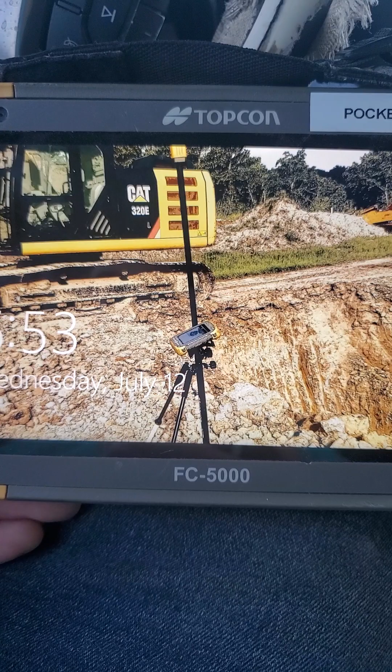What I'm going to be doing is showing how to understand what we're doing on the job site when it comes to this GPS.

Alright, I'm going to go ahead and sign in. This is the FC5000 Tesla. This is a job I did back in Houston.

Look at that, beautiful. Anyways guys, as you can see, it looks just like a computer, because it is. This is a tablet that is a computer. It can do everything your computer can do.

I highly recommend that you don't do things that you shouldn't do, mainly because once you get a virus, it is really hard to clean these things up. It is a computer, but it doesn't act like a computer sometimes.

So when you get to this screen, the only thing you should do is just click on this right here.

I got one of these pens right here. As you can see, I got this at Best Buy. It's the bamboo.

Sorry for my dirty fingernails. Jesus Christ, I guess it comes with the job, right? Play with dirt all day.

Sometimes you gotta double tap it. Alright, so sometimes you gotta be slow with these things.

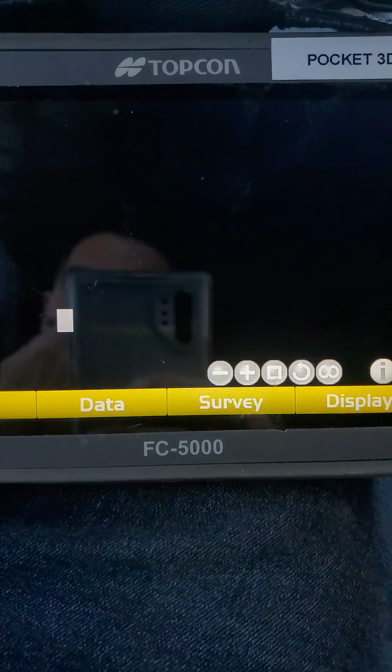Alright, so this is the project that I was at yesterday. This is my base, it is not set up. Okay, this is the GR5.

Some of y'all are probably using the newer ones, which, newer isn't always better. Alright.

So guys, this is the plans. Okay, so when they put the plans, they're going to create a CAD file. With that CAD file, there's a guy that will take all the information from that CAD file and he'll design this on a computer in a TP3 file. And all it is, is a different type of format that allows the software to be able to understand what that data is and use it.

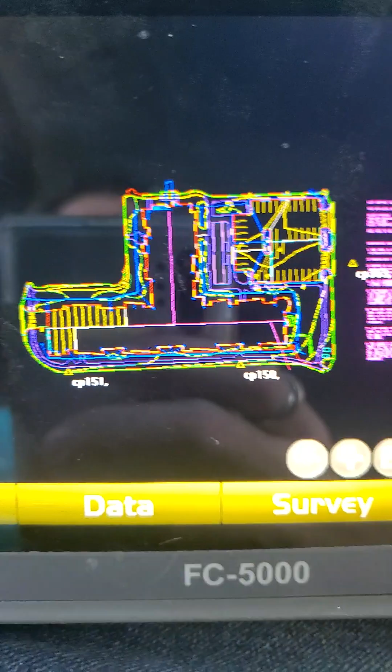Now let me just put this out there, I could be completely wrong. I did not go to school for this. So if I do say anything that is not correct, please correct me in the comments. I would love to learn maybe the terminology of some of this stuff and actually what it means. But I can at least show you and tell you how to go to work with this.

Okay, so what we're going to do here, as you can see, I'm not connected. I'm not going to be able to connect because I don't have anything set up at this job. I'm at a whole different job. I don't even see a GPS pole here.

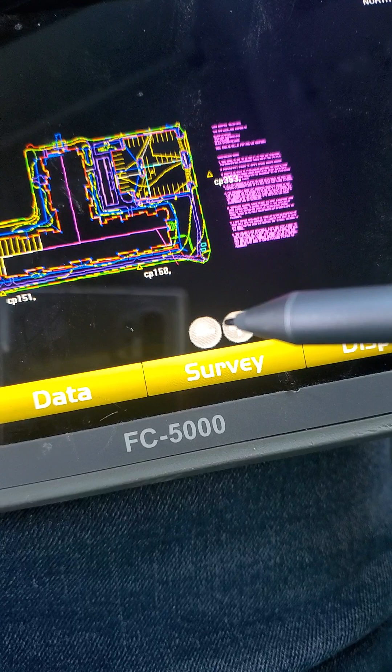So as you can see, you have all your little buttons down here. You see that hand? As of right now, I can grab everything. See how I can grab it? I can zoom out.

Oh, and let me tell you, I've done this before. I have uploaded a job into this, and that's all I seen. And so I figured that I did not upload the job right because it was just a little dot. Make sure you zoom in, okay? Because it took me 2 hours to figure out that I didn't zoom in, and I could have easily really messed up the file trying to figure this out.

So for some reason, this thing zooms all the way out. I don't know why, but that's what it does.

Alright, so as you can see, this is a parking lot. You know, I don't really remember. Oh that's right, okay so this is a parking lot, and these are apartment buildings.

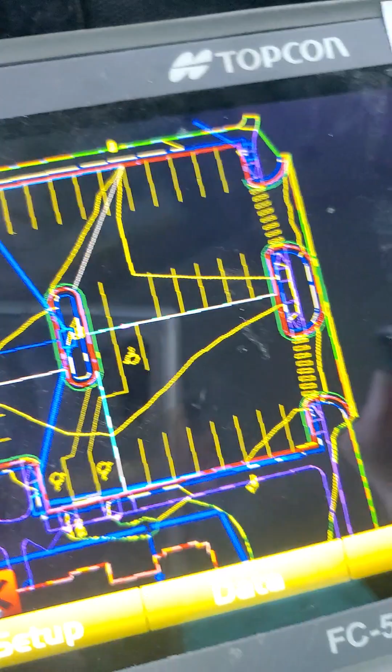And you can see all these lines, and it can be kind of confusing, alright? So you see the red, those are my curbs.

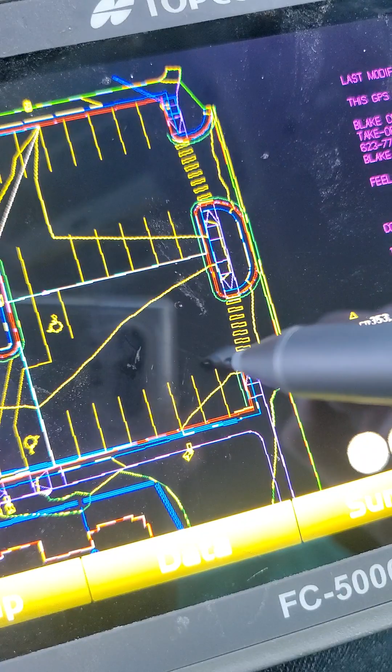Okay, when I'm running GPS and I'm going to cut this parking lot out, it's got to be pretty perfect. You got to get it to a tenth at least. And when you're cutting, when you're taking your dozer and you're going through here, you can't just turn on GPS and cut it out.

People have a misconception of what GPS is, and they think that anybody can just get in GPS. And then, another thing, I've seen people with 30 years of experience on a dozer, and you stick them in a GPS dozer, and they can't do anything.

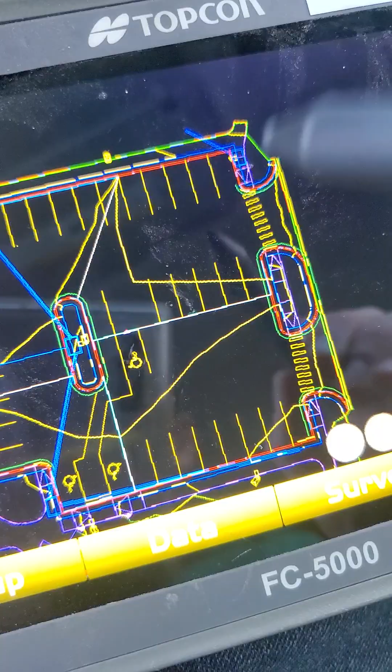So, GPS, being a GPS operator who's actually good and understands the GPS is a whole nother level, okay guys?

So let's say that there is nothing here and it's a flat field, and it's your first day on the job, and you want to figure out how to get this job started. Alright, so first off, you're gonna go stripping grass, you know.

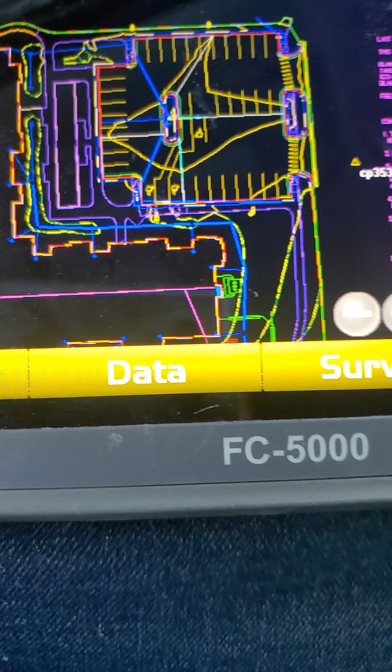Now, if the job isn't lined out, what you can do on the dozer, what I always do is track around. You need to take that dozer, put that blade barely on the ground, and go around to see what's there.

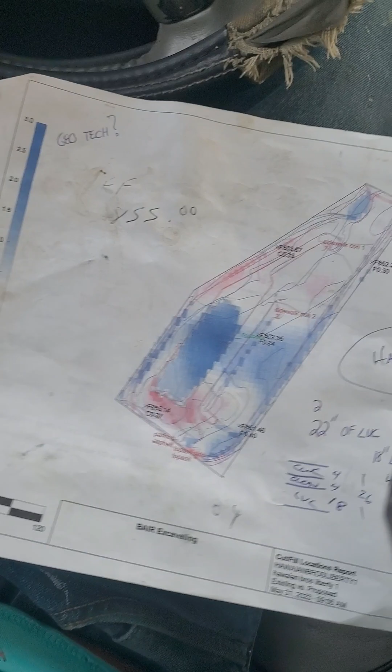Now, you can look at a topo. This is what a topo paper will look like. It shows you where the fill is and where the cut is. That's nice and all, but you need to know yourself.

So when you go out here you need to figure out where this cut is. All you gotta do is make a few little cuts. Don't try to hog out a whole 2 feet. Put your blade down and watch.

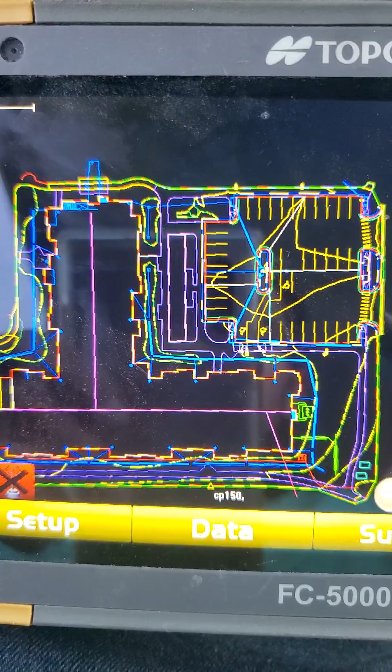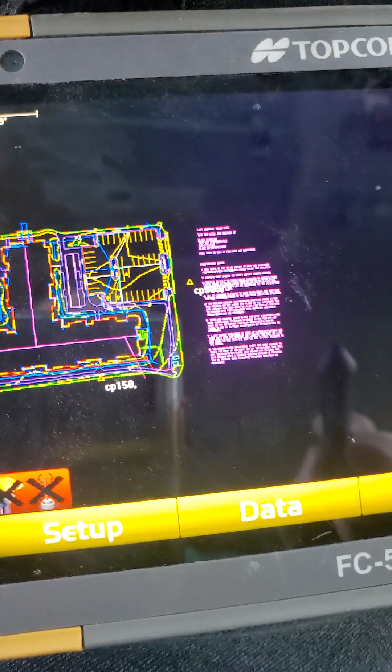Another thing is, guys, I'm gonna make another video to set up your dozer. I've been working, so I moved out here from Texas to Kansas City, and dealing with some of these operators, I don't think they fully understand the full potential of the GPS tools on the dozer. So I'm gonna make another video when I have time in a dozer to reset up your display options, so you can have your indicators here on the dozer.

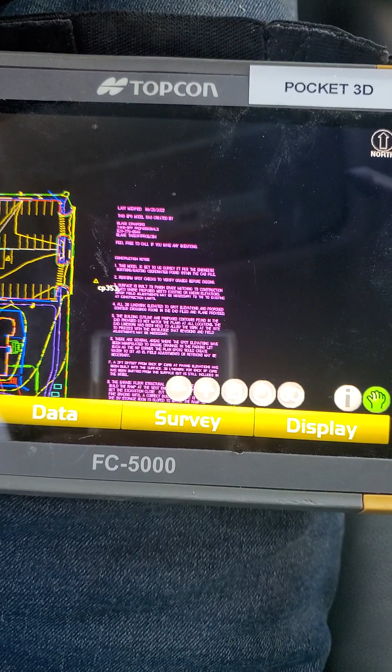I don't have it, but you can go into options and pull up your viewing options, and on the left side and right side you can put grade indicators. Those grade indicators are going to tell you the corners of your blade and where it needs to be. I don't understand why anybody would not want that. So when you run your blade on the ground, you can see how high and low it is right there in front of you without having to do the math of these little numbers over here.

You don't have to even think about numbers. You can just look. If it's in the green, you're good. If it's in the red, you're high, or something, it's one or the other. Who knows? But I'll make another video.

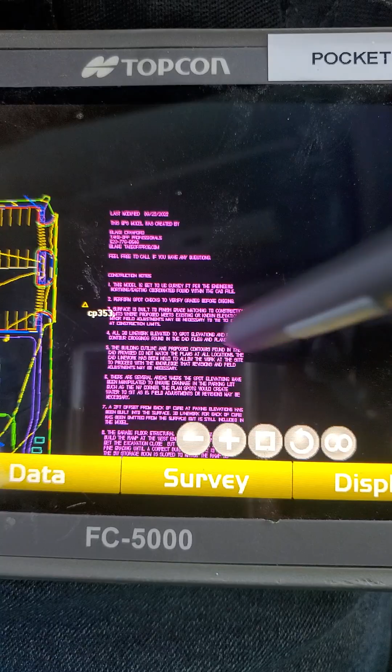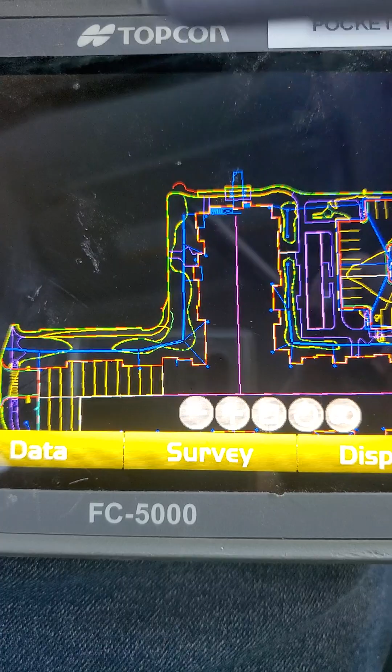Alright, like I said guys, this is just an intro to this channel. I'm just pretty much giving y'all some detail of what this channel is going to be about. Another thing I'm going to do is pull up plans. I'm going to put plans on here and show y'all how to read those plans and how to take those plans and incorporate that into this as you're working on a daily basis.

Okay guys, I was at a job just a few days ago. This guy was running GPS. This ain't the job. I could probably pull up the job, but I'm not going to do all that. You know what, let's do it.

Okay, so look guys, if you want to change jobs, here's your data. All this right here, let's go through it. Project - that's where all your projects are.

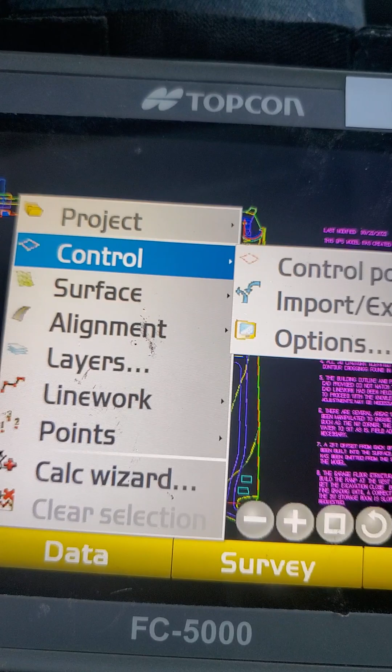Control - that's going to be where your control points are. Your control points are your points that should not move throughout the whole job site. Those points should be staked out with elevation, so you can always double check yourself. And you always want to double check yourself, guys.

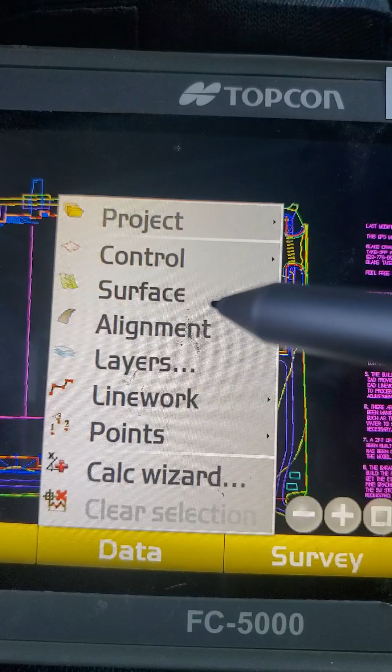This GPS is not always right. There are so many factors that can come into play that can make this GPS off. So if you have a rover, I would check your blade as much as possible. Know what your dozer is going to be at.

If you don't have a rover, you can easily check it by other means. If the job is already going and there's already stuff out here, you can take that blade and do what's called a position check. I'll make a video to show y'all how to do all that. You can shoot it off one corner of the blade, and walk that dozer up to something that is already built, like a curb, top of concrete. You can pull the plans up and see what that elevation is supposed to be.

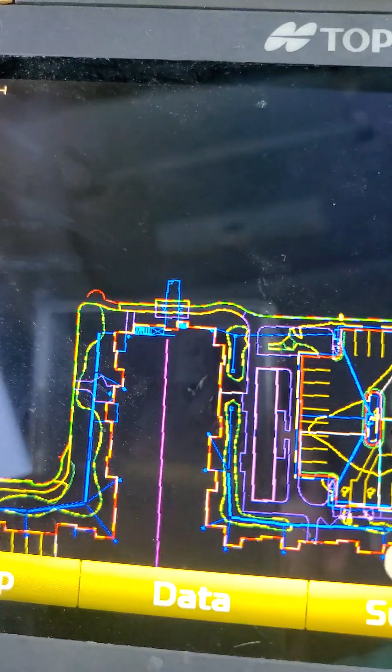Let's say it's supposed to be 973.00. Well, you can take that blade and put it right on top of that concrete. Alright guys, sorry about that, I had to get in this machine because I also have to work. Anyways, back to what I was saying.

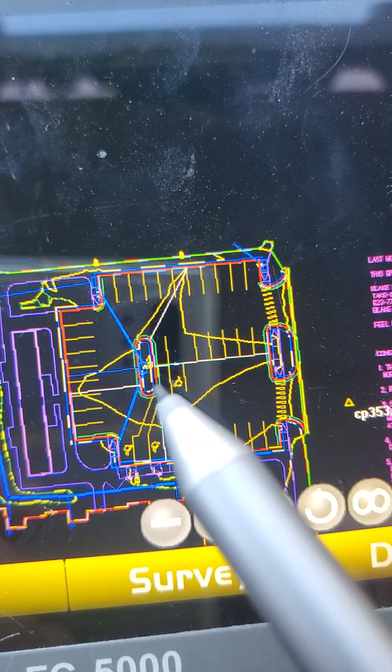You can take your concrete, or you can take the top of your blade, and come over here, find the elevation on the plans. And with the dozer, you can do a position check where it shows you the elevation, and you can put that blade right above the top of that concrete, and you can pretty much tell if everything is adding up. You can see on the GPS on the dozer, if your blade is above the concrete and on the GPS screen it's showing you're over here, something's wrong. So you need to double check yourselves all the time.

I've seen where people have put something in and it's 10 feet off. Well, guess what? Ain't nobody getting paid, and you might lose your job.

Alright, so guys, I'm gonna go ahead and do a quick walkthrough. I know this is a little bit longer video than I expected, but we're gonna go ahead and really quick show you what all this means.

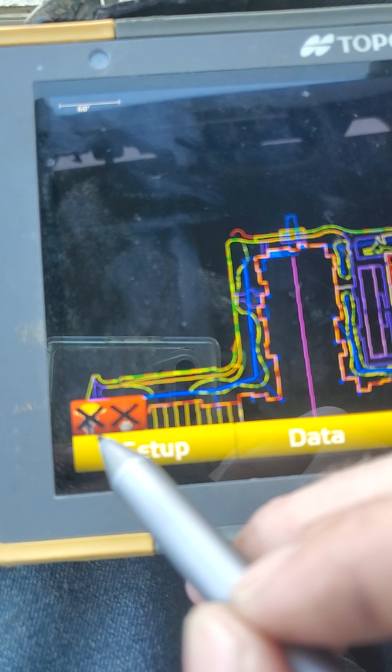Alright, so that right there is your base. No, I'm sorry, that's your base. Even though that one looks like the base, this is the base. This is the antenna, okay? So you have to remember that.

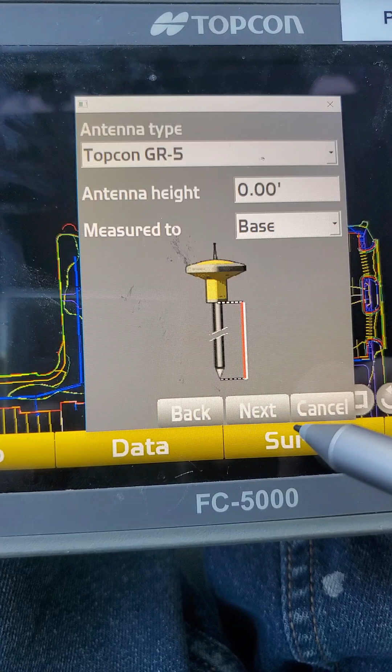This is how you set up your base station setup. If I was to set this up... known control point base. Usually I don't mess with this stuff, okay? Usually this is exactly how it is, alright?

We do 0. It all depends on who comes out and localizes the job. Whoever comes out and localizes the job is gonna really determine the height and what control point it's going to go off of. And once he does that, usually, alright, so you see what I just did there?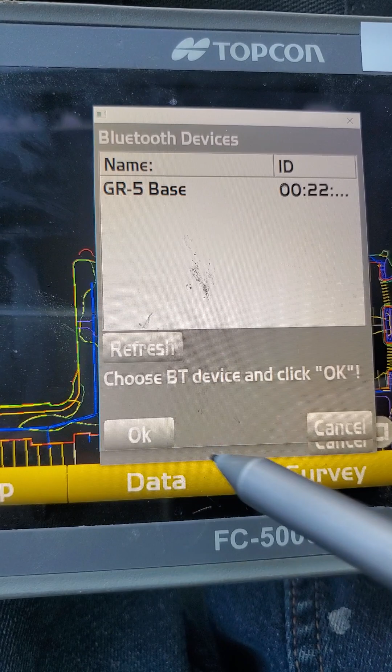Alright, it says connecting to base. Boom, boom, boom, let's finish. That is where I would click my base if it's on. My base isn't on, so what you would do there, click and then click OK, and it's going to connect to it. My base is turned off, it's in my truck, so it ain't gonna work. But that's how you would set up base.

Alright, that's pretty much all I use in this little column here.

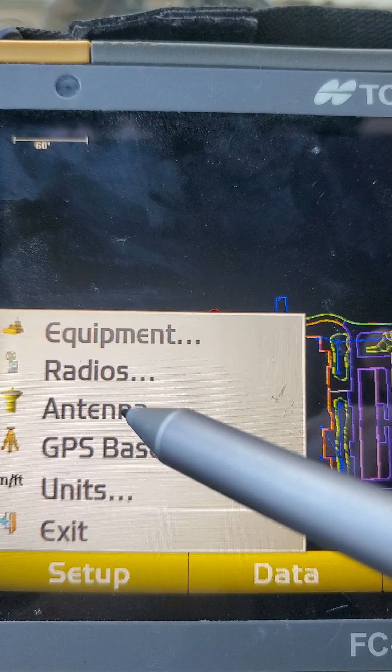Usually when you go to the radios and all that, that's because if you're on a big job site where multiple companies are out there and they might have other GPS equipment out there, you can change your radio channel. That way your signal isn't being interfered with by somebody else's signal. So that's what the radio setup and all that, that's what you can do with that.

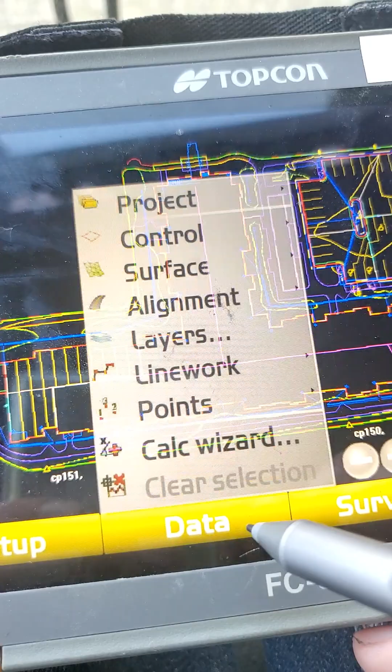Data, alright, so back to this project. So this is where all your... oh, sorry guys, I'm trying to click on this from the phone. Alright, so guys, go to project, boom. This is where all of the projects are. You can pick all these projects, you know.

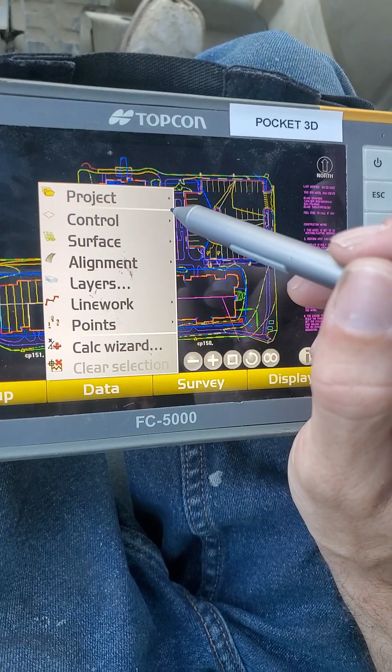Blah, blah, blah, alright, so that's how you get your project on here. You always need to make sure you have the right project before you set your base up, okay? Or else it's going to think it's at a different project.

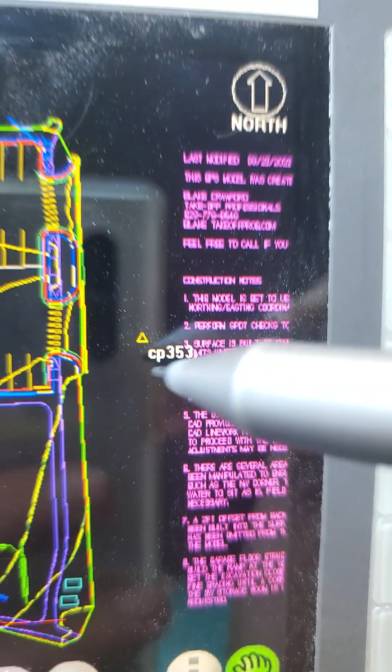Your control points, you can actually see the control points. You can pull the control points up on here where it shows you where they are. My control points from the guy that designed them look like these. They got a little triangle and it says CP for control point 353. It's going to tell you. I can pull the elevation of that control point at any time.

Let's say that my base station, which is on this control point — let's say a mower is mowing on this property, not this one, and their mower hits my pole, because we put poles in the ground so they stay there all the time. Let's say someone hit that pole. Now that pole was compromised and we can't use it.

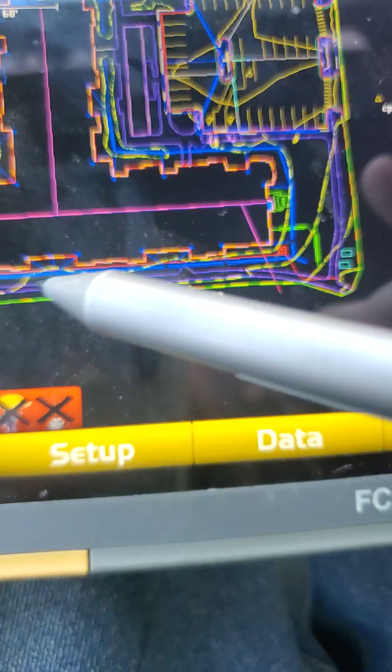Or if it's in a bad spot, let's say they wanted to put an entrance here and somebody wasn't really thinking, or the project changed, and instead of an entrance there, they're going to put an entrance right here on my control point. Well, you can use a different control point. Those control points kind of help in a lot of ways.

Alright, so let's go back to this. That's your control point, surface. Alright, so guys, that's the finished design surface. Alright, and here it looks like I got a road surface.

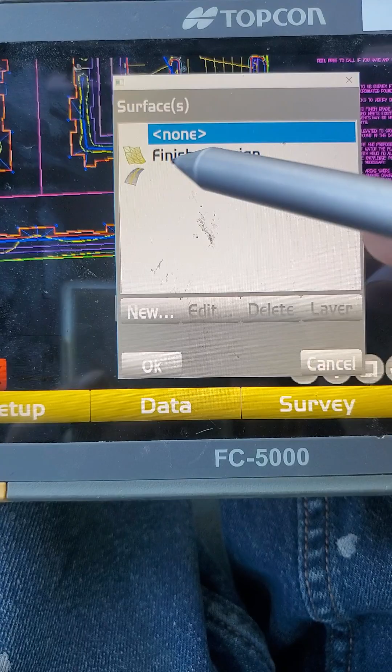The surface is what is showing on the screen, okay? And then you have layers, okay, so you can change these layers.

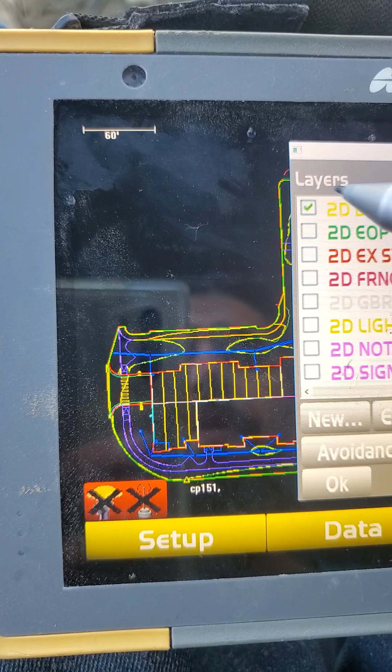Let's say I don't want to see half of this stuff, alright? I don't need the 2D curve. And honestly, man guys, let me just be honest, it's been a while since I've done some of this stuff, so I might be wrong on some of this, but I'm giving you an idea of what you can do with it, okay? So let's say, I think I'm going to turn a lot of these things off.

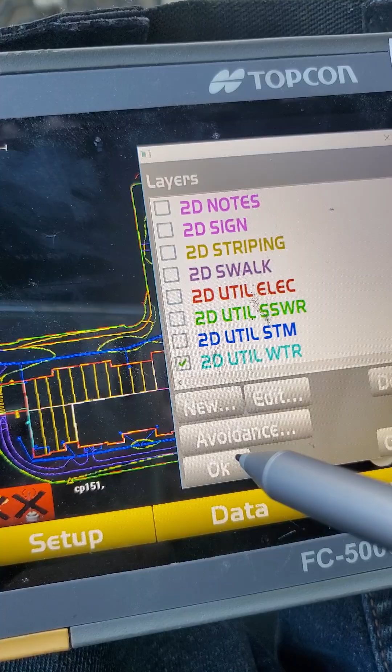Let's see. Look at that. I was able to get rid of all the stalls.

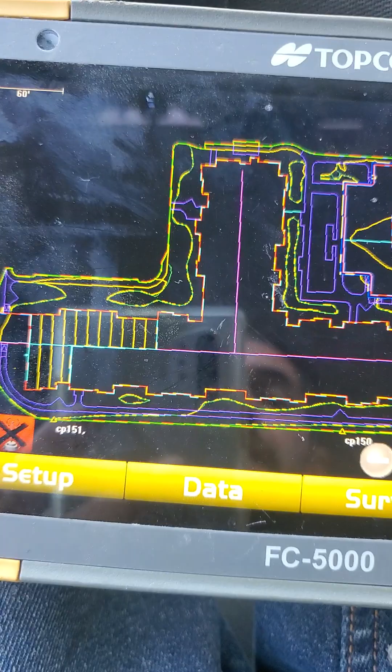Alright, curb line, whatever. Now that that's not on there, the blade on my GPS isn't going to mess up when I go over those lines. So if I take my dozer and track along here cutting grade, and I pass over that curb, guess what's going to happen? If half of my blade is on that curb and the other half is over here, it's going to want to split that blade in half, because this is a higher elevation than down there, since you're cutting out a parking lot. So you got to keep that in mind. When you take these lines off, that allows you to not have that problem, and you can work your way up to the curb.

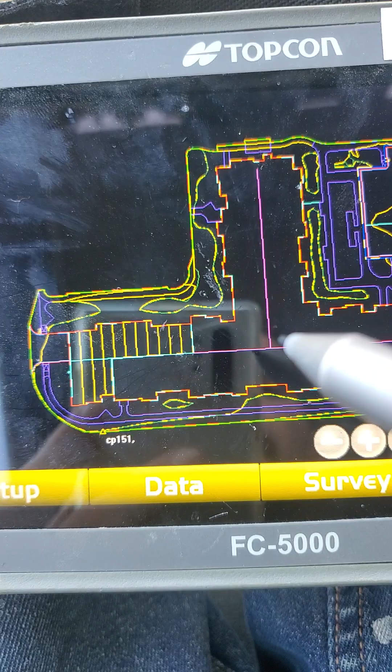So let's say you're going to do a building pad, right? And you got all these lines going on, like underground pipe. When you travel along there, your blade's going to act up over those because it's trying to read the pipe elevation, the curb elevation, the pavement elevation. It's trying to read all those elevations at once, and it can't. Now, you don't have to get rid of these lines to fix that problem.

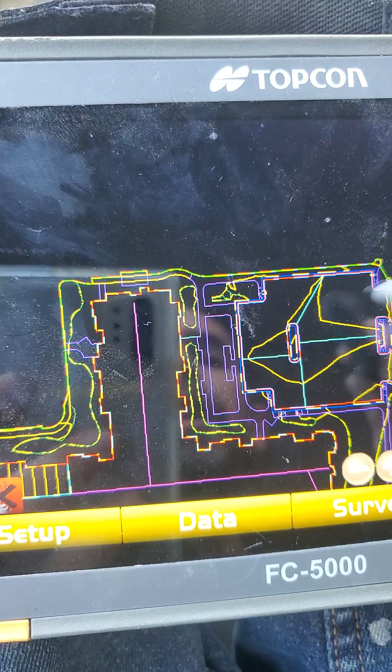But what I'm getting at is, when you're doing stuff like that, you don't have to get rid of these lines. I'm just showing y'all to give an idea what this stuff is, what these buttons do, you know, layers. I took those layers off. Now you can see that not all of the data is on there. So if you were working on an area and needed to really see what was going on, and needed to get rid of something throwing off your GPS, that's where you can go to do it.

Another way you can do it is what's called blade control, where best fit is going to be best. On a dozer, I'll show you later, but there are multiple options: best fit, and then there's also pick a corner. So you can do best fit, and it's going to base off the whole blade, whatever it thinks is best. So if 50% of your blade is in the parking lot and 50% is in the curb, you're out of luck. But if 60% is in the parking lot and 40% on the curb, it's going to shoot for the parking lot. Does that make sense? That's best fit.

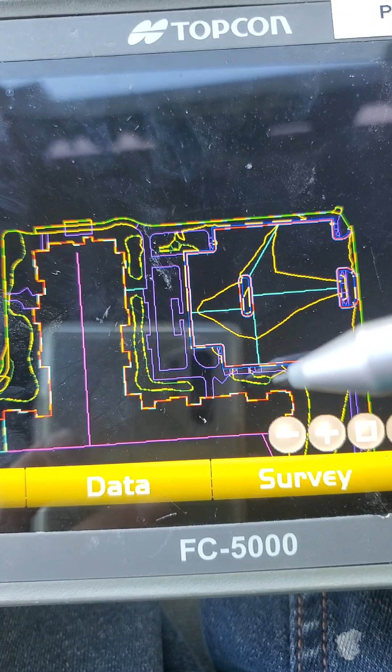Wherever most of your blade is at, that's where it's going to try to cut, that's where it's going to try to shoot off of your blade, okay? If you only got a foot on the curb, it's not going to pick that up, it's going to do the rest of your blade on this side of the curb. But if you got only a foot over here and the rest of your blade on that, it's going to try to cut this and not that. And that's where those old timers get really confused on that GPS, because they don't know what's going on. All you got to do is change where you're shooting your blade from, or come at it a different direction.

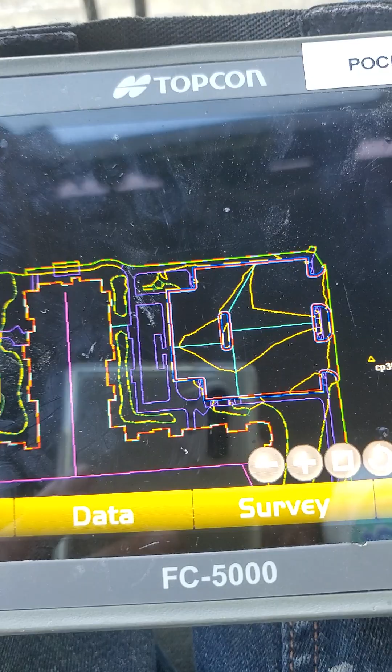I hope the AC works in this thing.

Anyways, so that's where we're at, layers. Extremely loud, Jesus guys, sorry about that. I'm in some rinky-dink freaking excavator.

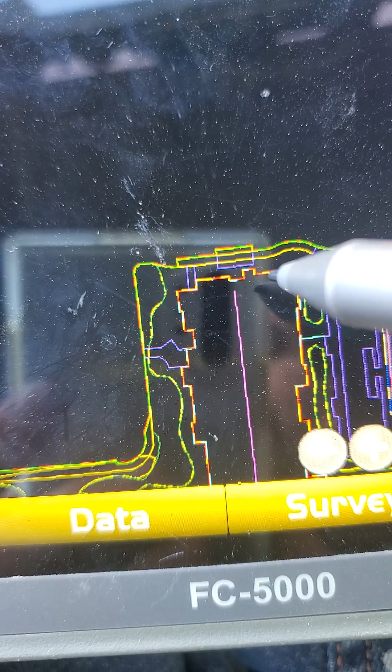Alright, line work, so this is where you can pull up all your line work, okay? Also guys, another thing, this is where, let's say you need to create a plane surface. What a plane surface is, alright guys, let's say this is your building and you're going to do a building pad, okay? And you got all these crazy lines going on and your GPS is not able to figure it out. So then you got to troubleshoot and make it figure it out. How you can do that is do a plane surface.

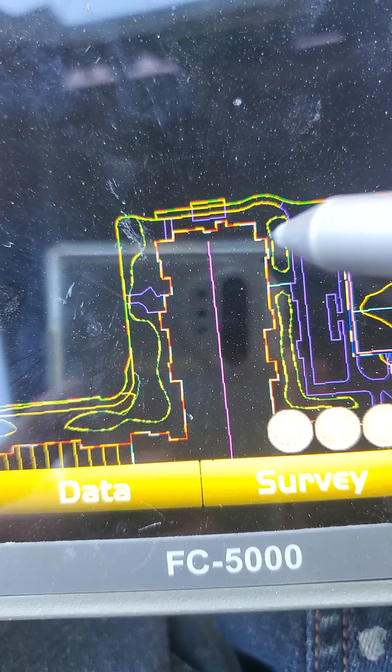Alright guys, you can look at the plans, double check the plans, always double check the plans. Some guy at home that figured out how to make this stuff and make money, you can't rely on that guy, because let me tell you, you don't have to go to school to be able to make this model. There is no degree required to make this, okay? So you can't depend on somebody you don't know who didn't even go to school for it.

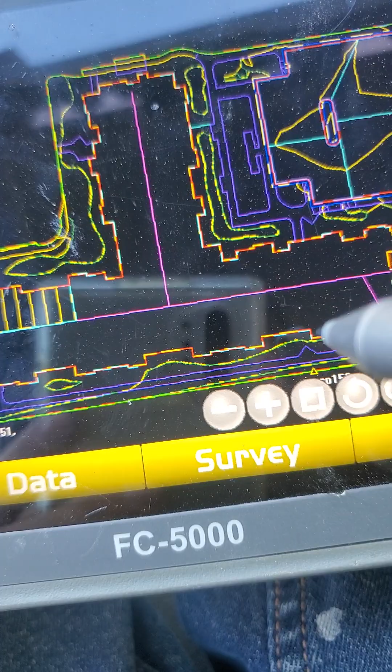Okay, always double check the plans. Right here is your elevation, and this is your pad. Let's say on the plans you have an elevation right here, and you look at the plans and you see the elevation.

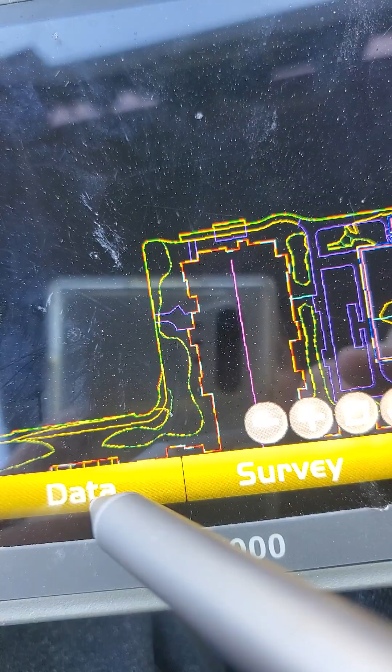You can take that elevation and create a surface that will allow you to put that elevation number in the GPS computer, and from there on, everything you cut will be at that elevation.

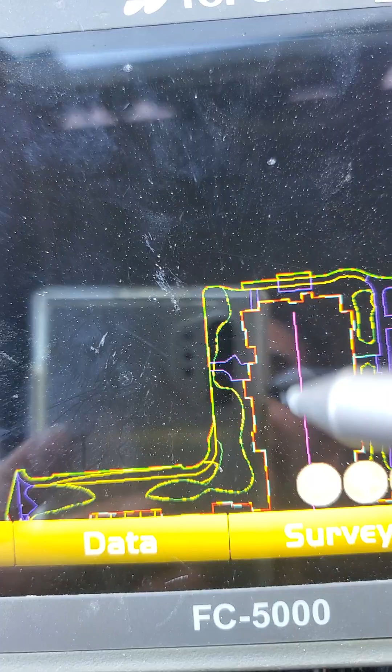Okay, so if the building was at 973, that's the elevation for the building pad. You need to cut this pad out. You could literally cut this whole job out at that elevation on auto. Now, what I mean by auto, I don't mean the dozer's gonna do it for you.

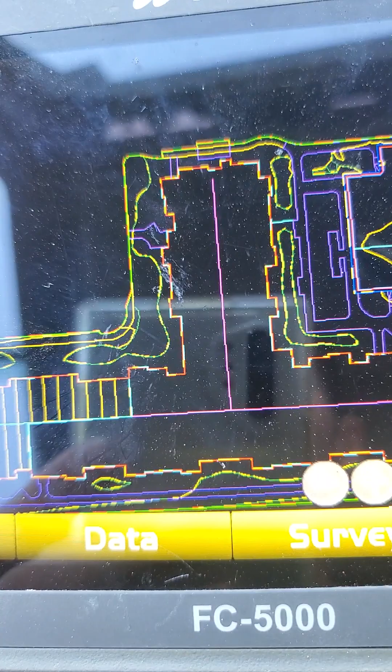Guys, you got to get it down to at least a couple tenths. I like to get it down to two tenths or a tenth before I start using my autos, because the auto is there to do finish grade, not to cut the whole thing out. You can, don't get me wrong, you definitely can, and I recommend you do. You could cut this whole job out to GPS.

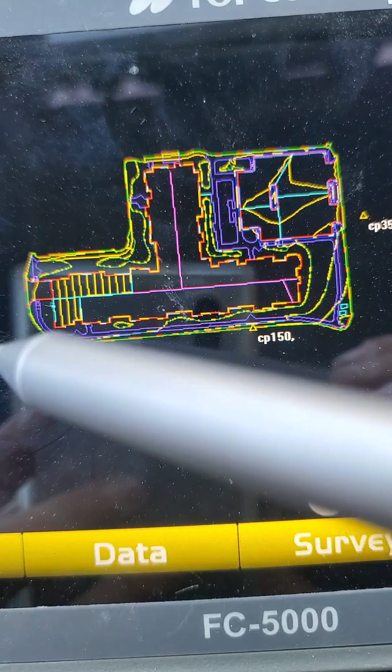Let's say that you did a topo on this job and everything's 3 feet too high, and you're gonna hog out a lot of dirt. Sorry for my language. Well, you can shape this whole job by doing a 3-foot offset.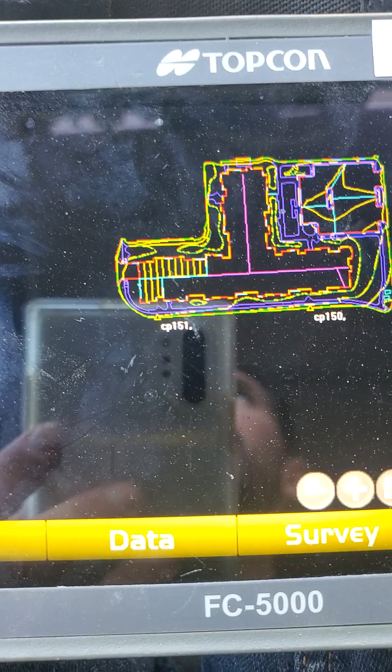Why would you do that? Because then you know what you're doing. You know that you're making it easier for the GPS if you do that. If you cut this whole job out how the GPS wants it, and then work your way down to grade by doing offsets, you can do like a 3-foot offset.

Let's start with the 3-foot offset. Let's say you're 3 feet too high. Well, you can put that blade on the ground and hit match. It will match the grade that you put that blade on, and it'll cut the whole job out to that grade, and it'll show you down there what the offset is.

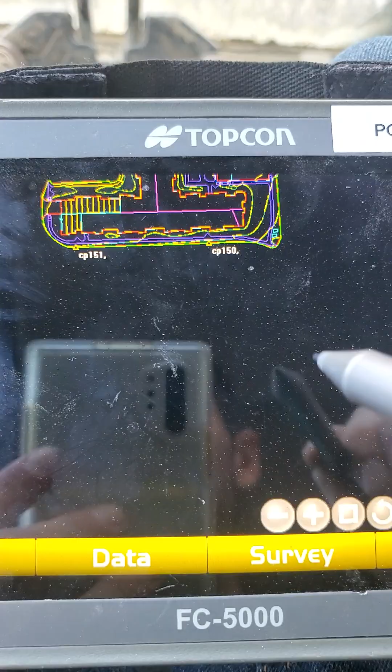All right, points and line work. So the line work is all these lines. The guy that created all these lines, well, guess what? You can create some too. But I'm not gonna show y'all how to do that right now. I don't want y'all to get fired.

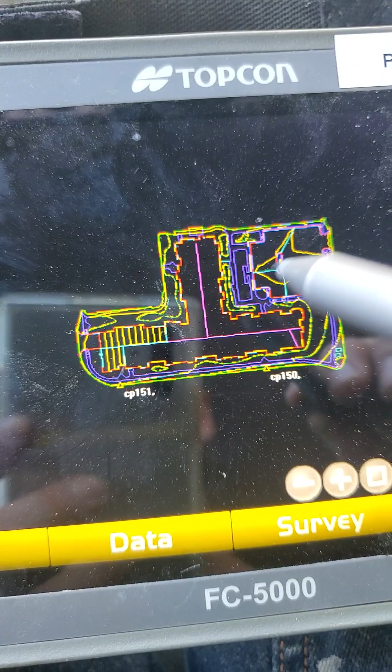You can import line work. Let's say there's a change order on the job and they want to change something. They can send you the new model, which is probably going to have all the line work. But let's say you wanted to create something. This is where you import and export your line work.

I could go create a job on a blank thing. I can go take shots and create my line work. I can do all that on this device. I can create this whole thing on here. Now, it ain't gonna be as accurate as doing it on the computer, but it can be done.

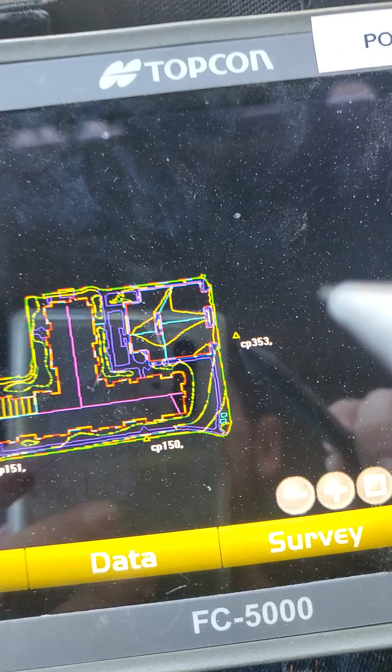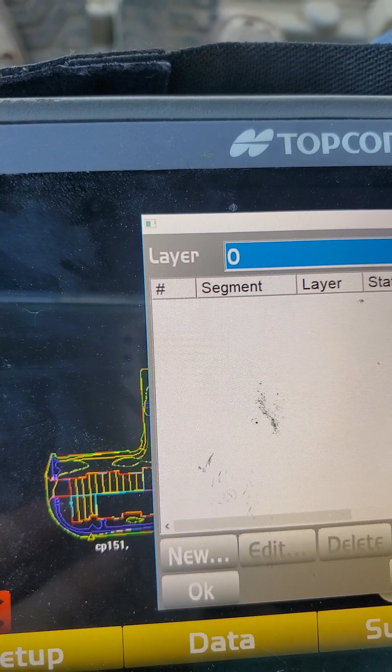Okay, and that's pretty much what that is. That's where you can export and list them, see all the line work and layers. I guess there's none in layer 0, but you can pull up all these and look at the line work on it. If you're having an issue with one of the GPS lines, you could easily double check that and look at it.

And we're still at that - points, same thing with points. All the shots that were taken on this job, you can look at them, see the elevations. I don't know why there's a layer 0 layer.

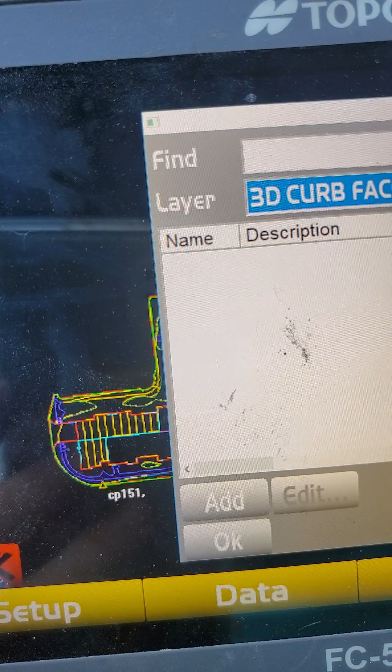Kind of stupid. But for instance, let's say... apparently nobody did that. All right, so anyways, it was probably loading. It was probably like 100.

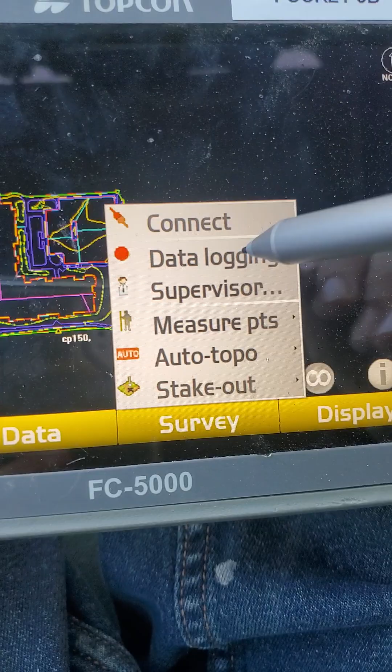All right, all this right here, guys, on this Tesla, this is for whenever you're doing rover. You need a rover to do this part. That's where you connect to the rover. The rover is another GPS base station antenna, and you turn it into an antenna for the rover, and you put it on the pole and you walk around.

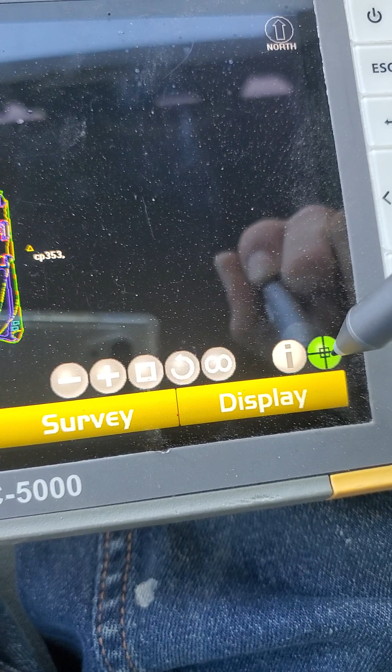And when you do that, you have these little things down here, and you can change them. So this right here, I can find a point on there, and it will make me line up to it as I'm walking. It's like playing a video game. Anyways, we're gonna move on.

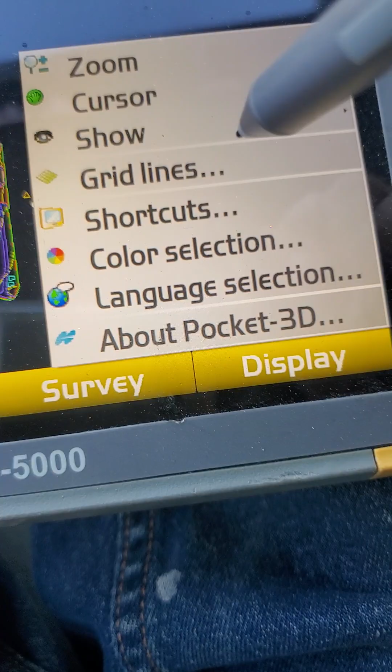That's what all this stuff is. Once I get a rover, I'll start showing y'all. This company hasn't really given me a rover yet. There's a lot going on here with this company, but anyway, your grid lines, you can kind of change. We'll go over some of that more. This is just an intro to this YouTube channel.